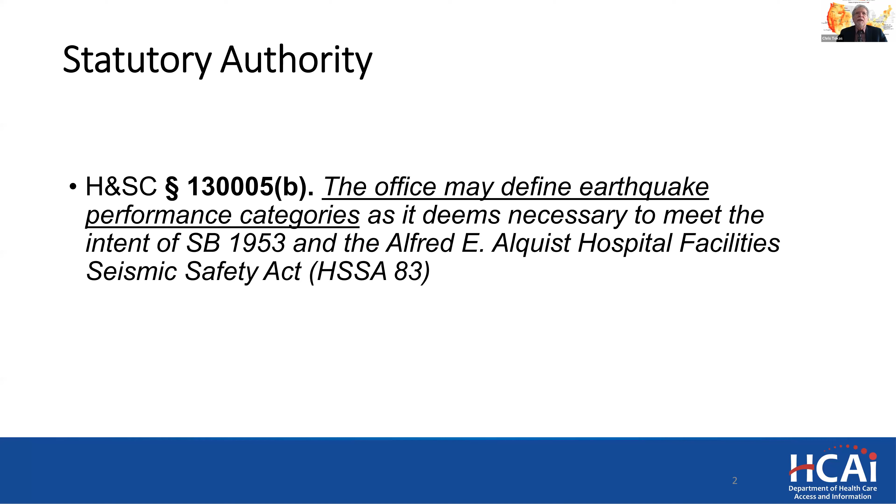So in 1994, the statute changed and required that all existing hospital buildings be evaluated. They were evaluated and placed in the appropriate performance category for each building. And through the Hospital Building Safety Board and the industry in full participation, it was decided that we had to have 5 performance categories, SPC 1 through SPC 5. All the pre-73 buildings, because that's when the Seismic Safety Act took place and created a new performance criteria for hospital buildings, which basically has become de facto around the world.

They were either placed in 1 or 2. 1, buildings that pose threat to life. 2, buildings that just made what we call life safety performance, which in reality still pose some form of risk to life, but it's very low. So all post-1973 buildings were placed in 3s, 4s, and 5s, depending on when they were built, the codes they were constructed to, the deficiencies that they had, and so on.

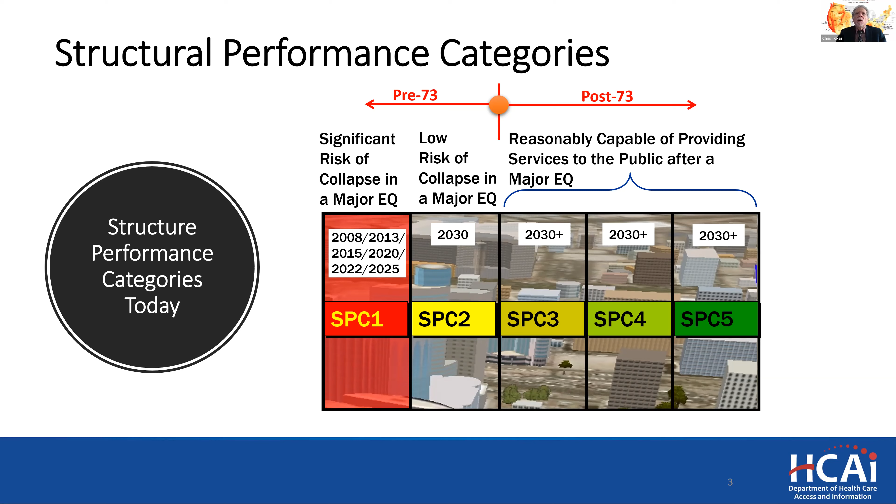Now, the next step was to go through the seismic evaluation reports, justification, everything else, and then quantify if the evaluations were done appropriately. In the meanwhile, hospitals had until 2008 to correct those deficiencies in SPC 1 buildings, so they're no longer collapse hazards, or remove the acute care services from those buildings.

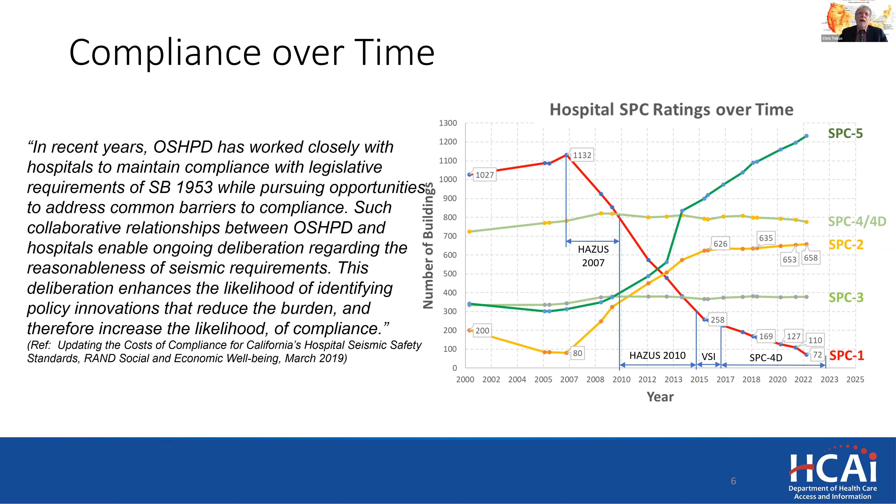So now, where are we today? Today, as you can see, we have about 700 SPC 2 buildings. We have 658 buildings in the SPC 2 category, but we still have 72 SPC 1 buildings. When I say SPC 2 buildings, here is again the paradox. They're not true SPC 2 buildings, and that's why I subdivided the SPC 2s.

Remember what I said a minute ago: most of the SPC 2s that we have today are truly SPC 1s, but they were reclassified SPC 2s based on a short window of probabilistic risk as far as the seismic hazards at their site, in their vicinity. So 514 of those we call SPC 2Hs, because they have been reclassified through the probabilistic analysis of hazards. And the true SPC 2s, either through retrofit or through evaluation, are, as you see there, 143.

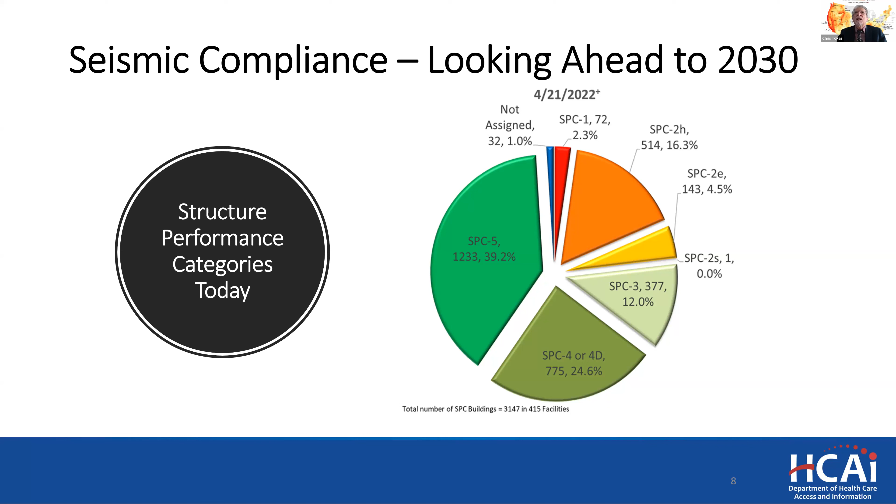There is a misconception of what an SPC2 building really means. Our building standards regulations say these buildings do not significantly jeopardize life, but may not be repairable or functional following a strong ground motion event. Meaning they have reduced probability of collapse, but may still have significant structural deficiencies that lead to damage beyond any point of repair, and they're not capable of providing services after a major event.

Some people don't understand that these buildings can be red tagged, requiring complete evacuation, or yellow tagged depending on the type of damage. They're not hospital grade buildings.

Hospital grade buildings, again not by California requirements but by national standards, have to be functional, and that's why they're designed to different standards. There are several issues with a hospital building suffering damages in an earthquake—it's detrimental to the community, inversely proportional to the resiliency of the community.

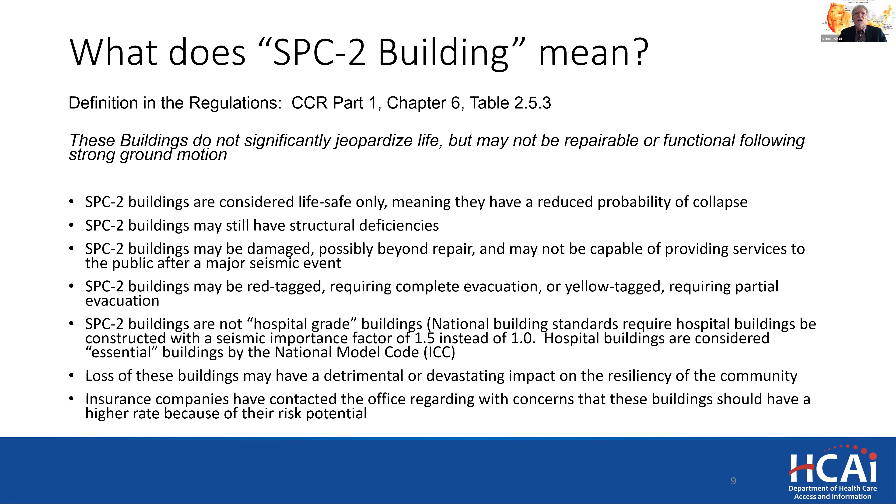I included this slide because we hear a lot of discussion about what an SPC2 building actually is.

The good news is that by 2025, we are projecting 673 SPC2 buildings. The bad news is that there is a number of facilities—60% of facilities across California—that have at least one SPC2 building. So that's not encouraging.

I will pass it to Roy, and Roy is going to move to the discussion on the main topic of SPC4D, and then Ali Zoomer is going to go into the non-structural issues, which is equally important.

Thanks, Chris. My name is Roy Lobo, I'm the principal structural engineer with HCAI. I will be going through a very quick, high-level overview of SPC4D refresh. We'll be talking a little bit about the motivation, some of the challenges we were facing in creating this new performance standard of SPC4D.

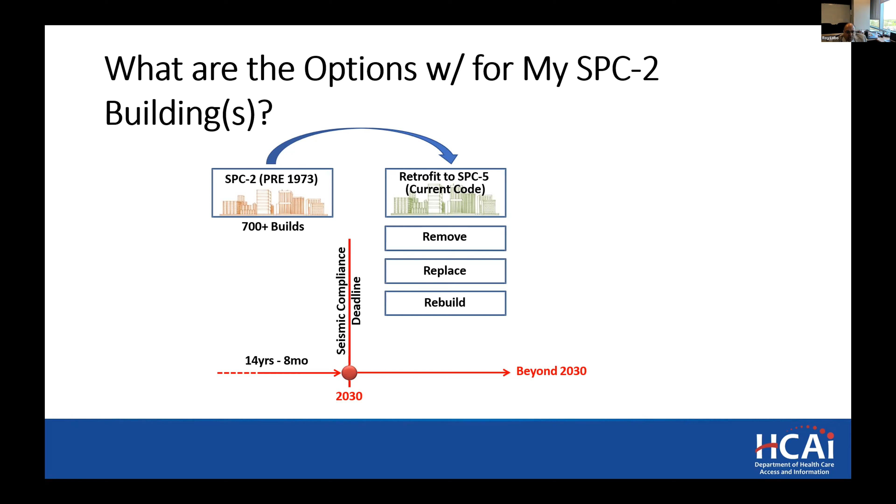So we were looking for a new solution. The intent of SB 1953 was to encourage—for buildings that do not pose significant risk of collapse—retrofits and enhancements to improve the ability of hospitals to remain operational. That was the intent of SB 1953 for the SPC2 buildings that were not going to be able to provide GACH services continuing beyond 2030.

So what were some of the concerns for 2030 compliance? This was back in 2013—model codes were changing, and it was becoming more and more costly because of code creep to upgrade an existing building to the SPC5 category, which was the only option at the time. Rural and other hospitals in underserved areas had limited resources to upgrade to current code.

The other thing was that SPC1 and SPC2 buildings were the original hospital buildings. They may be landlocked between other SPC buildings of higher ratings. But if you take that building out of service, it could cause the whole hospital to be non-operable. And the hospitals may not have property to build a replacement, because over the years the area around has been built up.

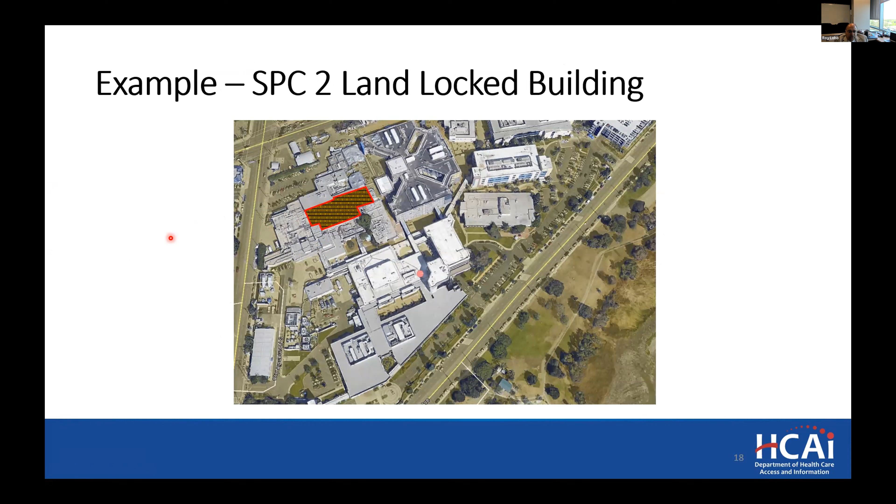So what was the motivation for creating this SPC4D performance category? The motivation was that there are some SPC3 and SPC4 buildings that are permitted to continue providing service beyond 2030. So we were thinking, is it possible?

At that time, the only option was to upgrade your building from SPC1 or 2 to SPC5. So is it possible to create a comparable SPC4 building instead of going all the way to current code? By doing that, we have less retrofit. We put targeted retrofit to specific elements, and we can minimize and reduce disruption to ongoing services. Hospitals could use this option to strategize their master plan and come up with cost-effective options.

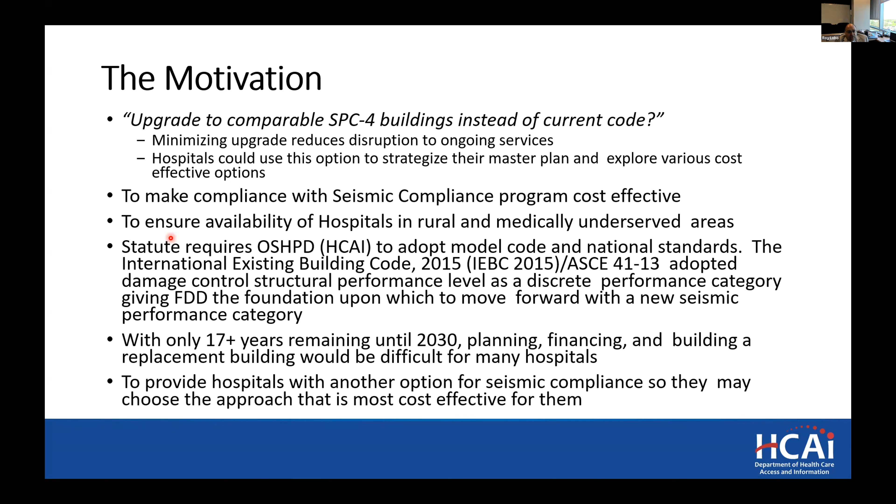It was also to provide hospitals with another option for seismic compliance so they could choose the approach most effective for them. That was the motivation. Then we were looking for the statutory authority for us to do that.

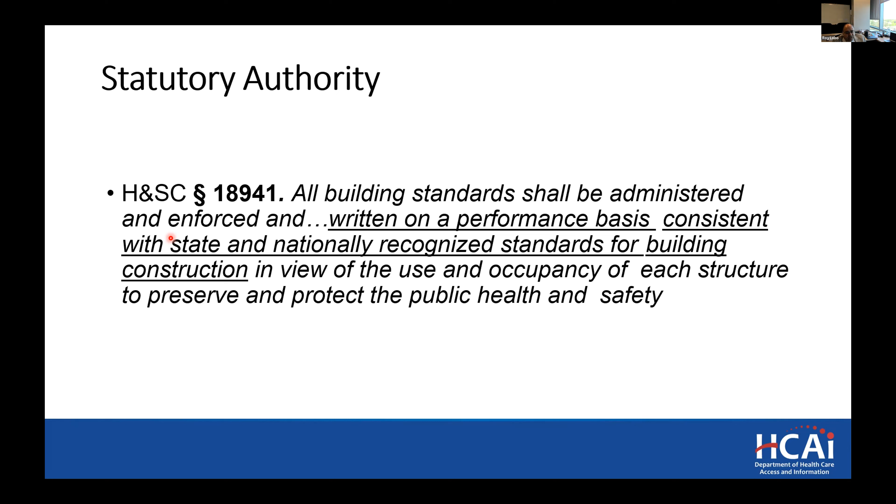We have that. It's given in Health and Safety Code section 18941. It says that all building standards shall be administered and enforced, written on a performance basis consistent with state and nationally recognized standards for building construction. So using that authority, we were looking for a solution.

Around 2013, ASCE 41-13 had just come out, and they also had a new performance level called damage control performance level. This damage control performance level is a level between immediate occupancy and life safety. That was given in the model code ASCE 41, and it's shown in this figure here.

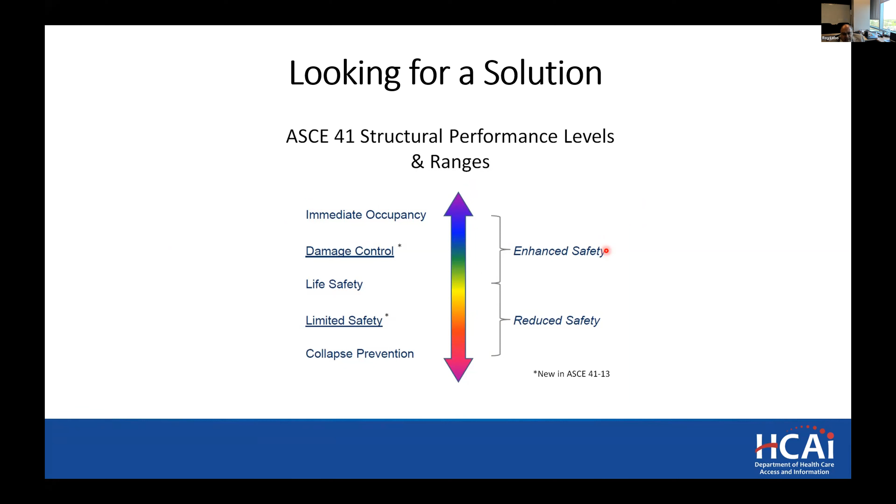So we have enhanced safety, shown by this blue arrow going up: immediate occupancy, then damage control, then life safety. Enhanced safety is beyond life safety, so your building will not only be life safe, but also has the chance of being operable at the same time. Then you have reduced safety, which is limited safety and collapse prevention.

So we had some options to explore: what can we do with our SPC4D buildings? Traditionally, we were just looking at life safety at that time, so the level of performance would be about that—your building would be damaged but life safe, though you may not be able to operate and perform as a hospital building.

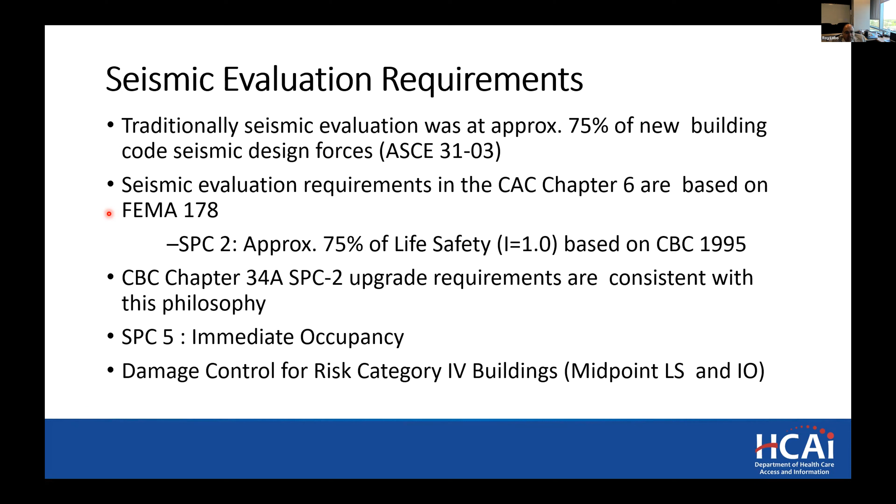Otherwise, you would have to upgrade it to SPC5. But with this new damage control performance level for risk category 4 buildings, we asked, could that be a viable option? For SPC2 buildings, which are the pre-1973 buildings, these did not have adequate seismic detailing and had seismic vulnerabilities.

So the only option for SPC2 buildings was to upgrade them to SPC5. SPC5 buildings are buildings built from 1989 onwards, to the 1989 code and onwards. However, there was a whole range of buildings classified as either SPC3 or SPC4.

SPC3 was the moment frame buildings, a separate category with pre-Northridge connections. But SPC4 buildings still had the seismic detailing connections—these are SPC4 buildings from 1973 to 1988. Any building built in that period was classified as SPC4, and they could continue to provide service beyond 2030. So we asked, is there a seismic performance category for this?

We decided we'd call it SPC4D, and we picked a midway point called 1980. CBC asked, is there a midway point where, if we upgrade now from SPC2 to SPC4D, is that good enough?

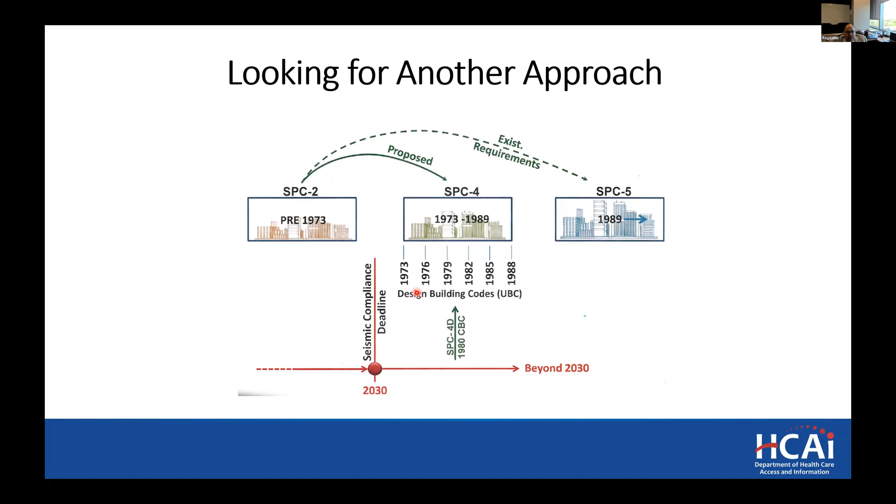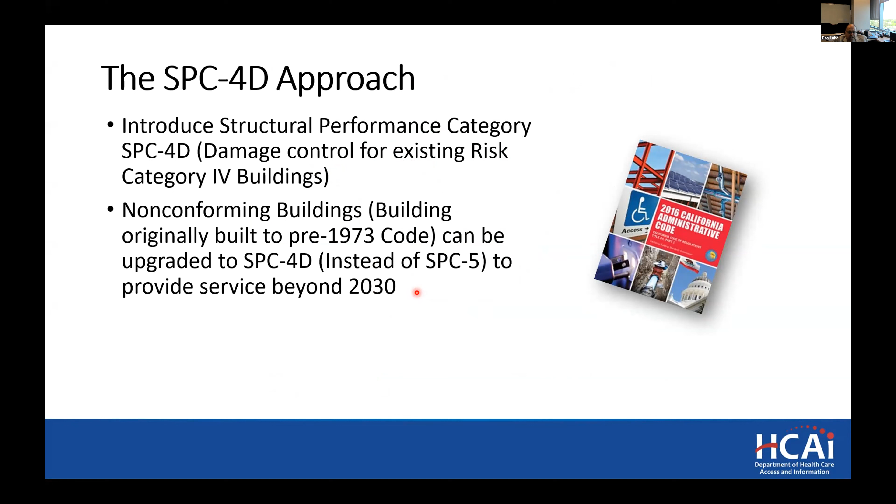We thought that could be good enough. We can upgrade it to the 1980 California Building Code, and then it would be adequate to provide acute care services beyond 2030. So the SPC4D approach introduced this new performance category for the non-conforming SPC1 and SPC2 buildings that could be upgraded to SPC4D, and then be permitted to provide service beyond 2030.

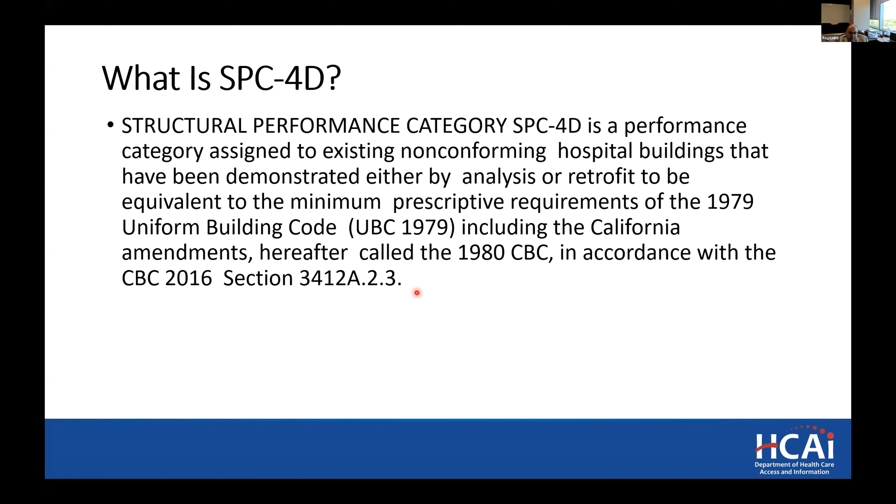So what is SPC4D? SPC4D is a performance category assigned to existing non-conforming hospital buildings that have been demonstrated, either by analysis or retrofit, to be equivalent to the minimum prescriptive requirements of the 1979 Building Code, including California amendments, which became the 1980 California Building Code. If you could show that your upgrade met this requirement, it would be classified as SPC4D, and you could continue to provide service beyond 2030.

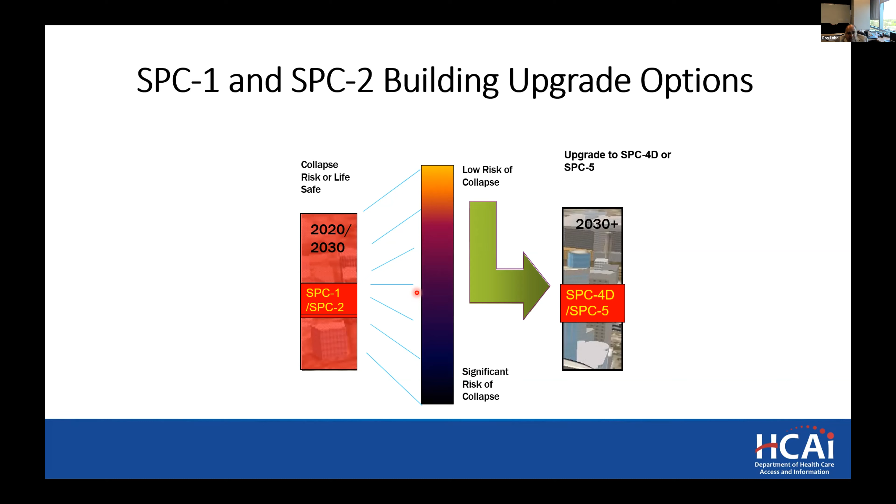So what were the options? What were the upgrade options for your SPC1 and SPC2 buildings? These are buildings, as Chris mentioned, that have a big range from low risk of collapse to significant risk of collapse. Previously you could only upgrade them to SPC5. Now we said you can upgrade them to SPC4D or SPC5.

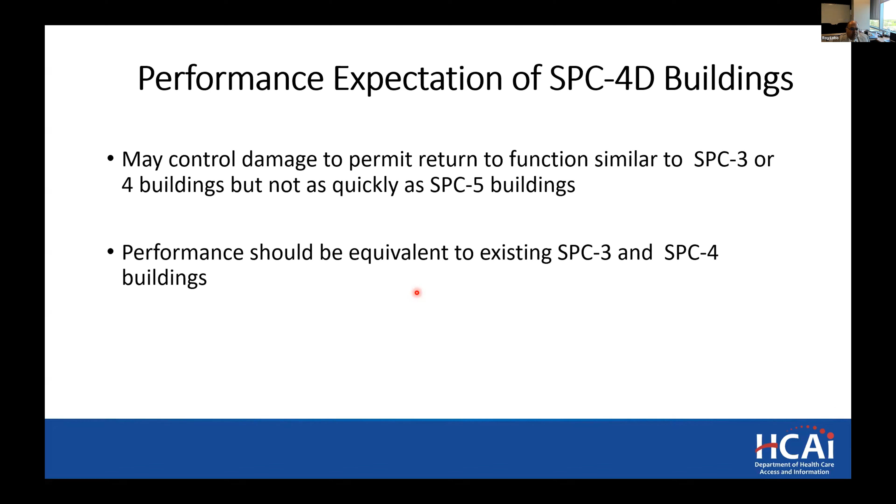So what's the performance expectation for the SPC4D building? They may control damage and permit return to function similar to SPC3 and SPC4 buildings, but not as quickly as SPC5 buildings. The performance should be in the same range as other buildings. If we have buildings from 1973 to 1988 that can continue to provide service beyond 2030, then I should be able to retrofit up to that standard.

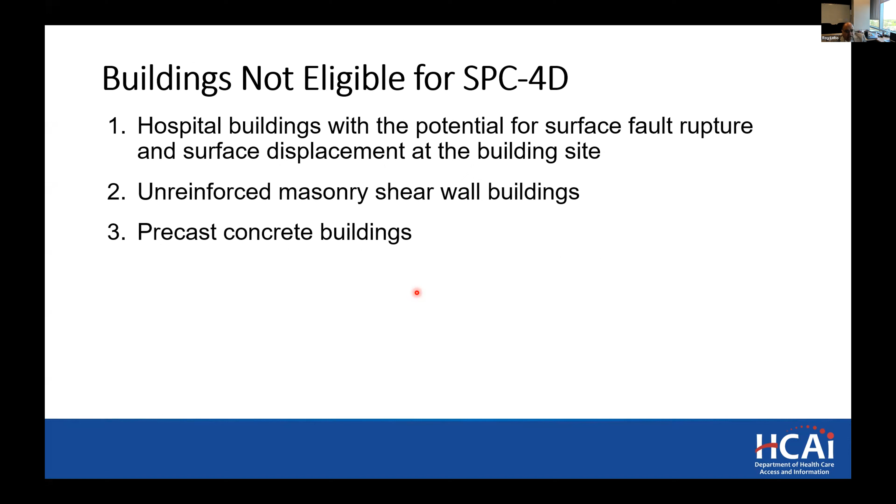However, there will be some buildings that we should not permit to upgrade to SPC4D. We said those are buildings on a fault - in the fault zone, which is 50 feet from a known fault trace - unreinforced masonry, or precast concrete buildings. Those are collapse hazard buildings, and they were not eligible for upgrading to SPC4D.

So, possible compliance issues using the CBC 1980. These are some of the challenges we had when we chose a building standard - okay, CBC meet that. But these are prescriptive requirements that had special seismic detailing, and you can't get an existing building to meet these prescriptive requirements. So therefore, you had to look for an alternate approach.

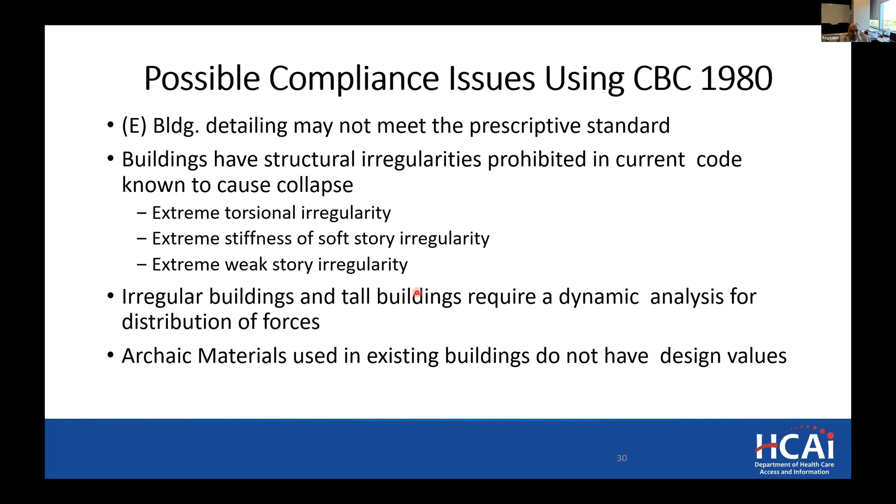The alternate approach was a performance-based approach given in ASCE 41, that permits you to evaluate your building, which has more brittle members and does not have the same ductility as prescriptive provisions. If we follow the ASCE methodology, which has different performance levels, you can decide based on the hazard risk. We can use that as a standard to say this is comparable to an SPC4 building if you upgrade to this level, and that will be good enough to continue providing service beyond 2030.

So we decided to choose two hazard levels. One is the BSE-1E earthquake, which is a 20% in 50-year earthquake, or a 225-year earthquake, and hazard level 2, which is a BSE-2E earthquake - this is your rare earthquake, which is a 975-year event.

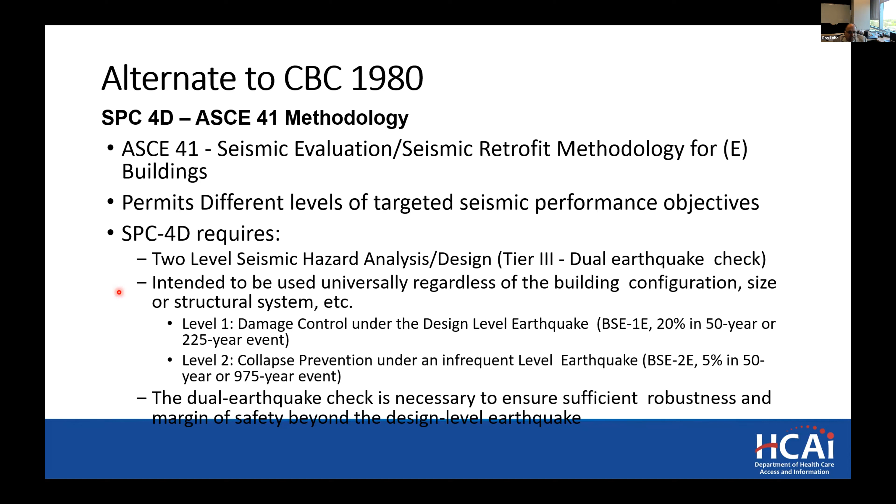At the more frequent level earthquake, we said you need to meet the damage control performance level. For the rare event, we figured out that the collapse prevention performance level was adequate. If they can upgrade the building to meet these two seismic performance levels, then they could continue to provide service beyond 2030.

Then if you move on to damage control, which is midway between life safety and immediate occupancy, you may see some additional damage, lights may be off and things like that. But we said that is good enough, because that is the same performance expectation for an SPC3 and SPC4 building. So if you have a strong design earthquake, meeting this performance was good enough. And if you have a very strong, rare event earthquake, then it should not collapse, right?

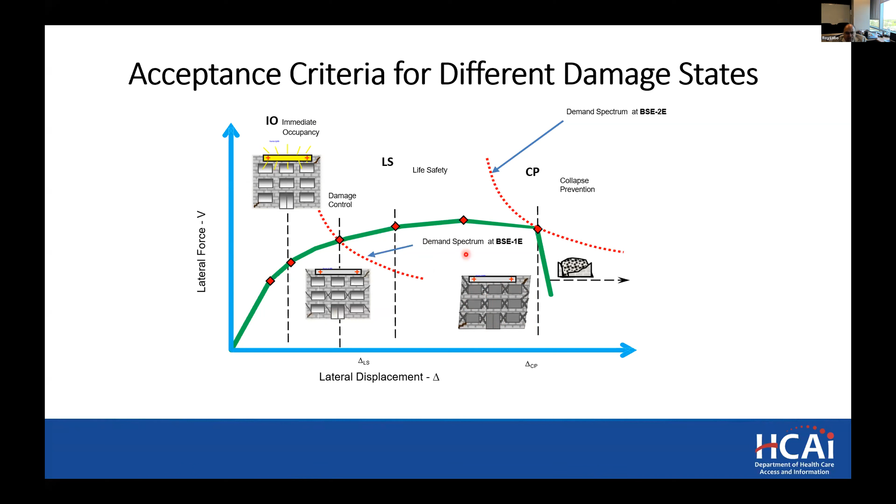So the collapse prevention performance level was the adequate level for this very rare event earthquake for these buildings to survive. I mean, it will probably not, they'll have to be evacuated, etc. But we hope those are not frequent, and it's a 1,000-year event earthquake.

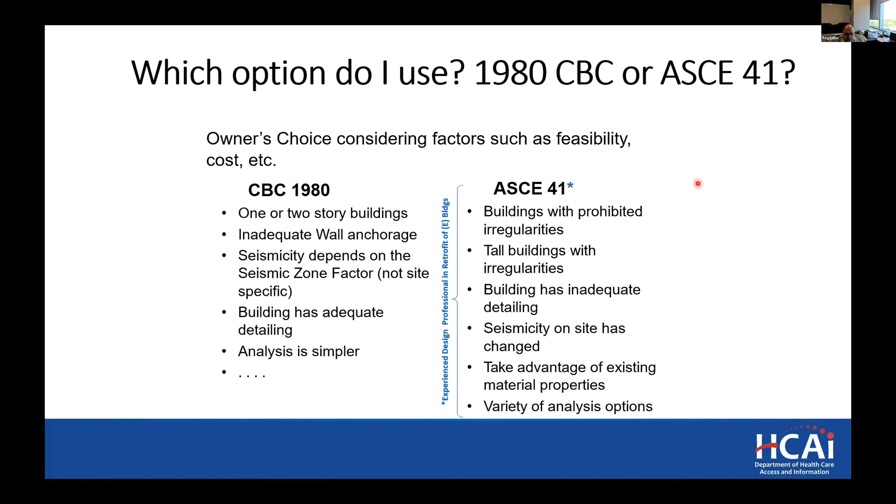So which option do I use, the 1980 CBC or ASCE 41? I can use the CBC 1980, which is the simpler method, but that's a prescriptive method. And most buildings will not be able to comply with that prescriptive method, and they would have to use the performance-based approach using the two hazard level criteria of ASCE 41. So if you could then upgrade to those standards, then you could classify your building as an SPC 4D.

Now, in order to get your building upgraded to SPC 4D for your SPC 1 or 2 buildings, what do you need to submit to HCAI? You will need to submit existing construction documents, and then you need field testing, inspection, and observation. So why do I need field testing, inspections and observation? Because these are pre-1973 buildings, they were non-conforming buildings at the time, and so they didn't have the necessary test and inspection.

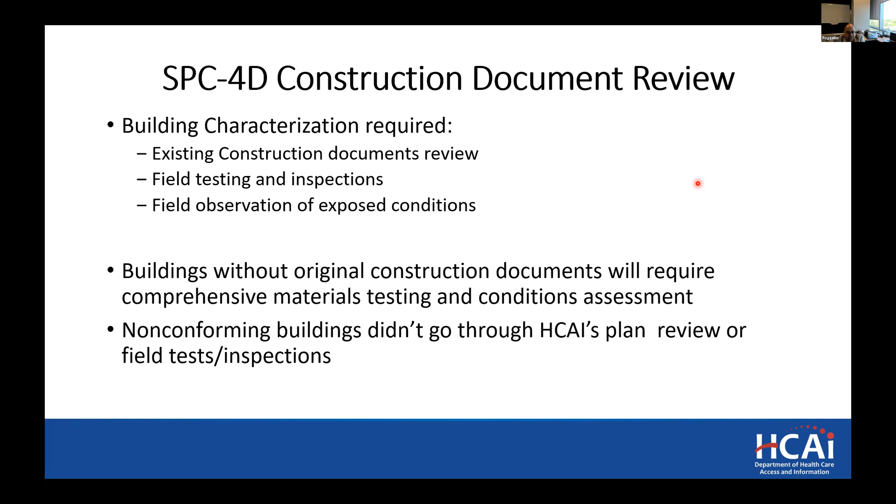So we need to have some measure to say, okay, we do some amount of testing to confirm the materials that you used, you can justify that, and then your analysis will prove out whether it can sustain that level of seismic hazard. And we have a new name for that. It's called an MTCAP program, which is a material testing and condition assessment program for the field testing and field observation program. So those are the documents you would need.

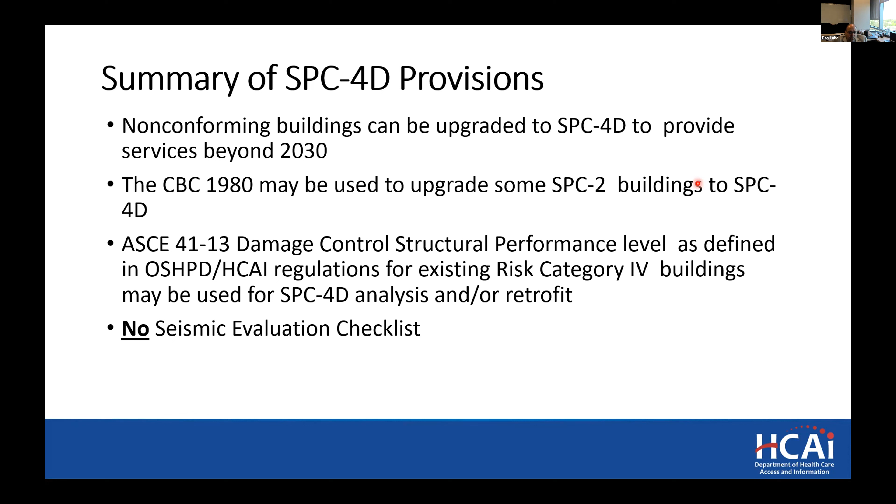So in summary, non-conforming buildings can be upgraded to SPC 4D to provide services beyond 2030. The CBC 1980 may be used to upgrade some buildings to SPC 4D, but because of the prescriptive requirements, not all would be able to use that approach. And then we had ASCE 41-13 damage control performance level. Risk category 4 buildings defined as SPC 4D would be able to continue to provide service beyond 2030. And the checklist that we had for upgrading from SPC 1 to SPC 4 would no longer be valid.

So retrofit was not the only cost. The cost of seismic compliance isn't the cost of the retrofit alone. There are also other costs involved, and that's where the hospitals need to be cognizant. Those are accessibility requirements. Whenever you're retrofitting an area, the path of travel also needs to be considered, and accessibility upgrades for that path of travel would be required.

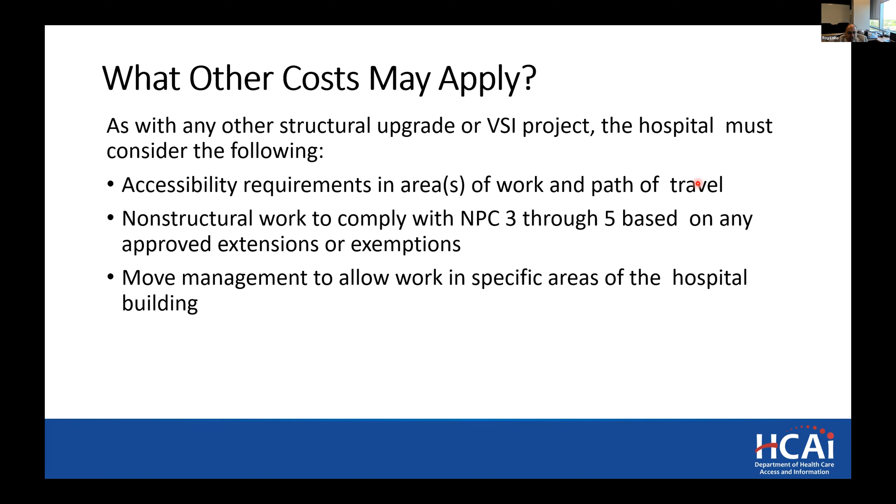Then while you're working in areas that are being retrofit, your building is going to continue to provide service beyond 2030. Therefore, some NPC work may also go hand in hand with that. And then you'll have to close down spaces, etc., for getting the retrofit done. So that additional cost would come into play.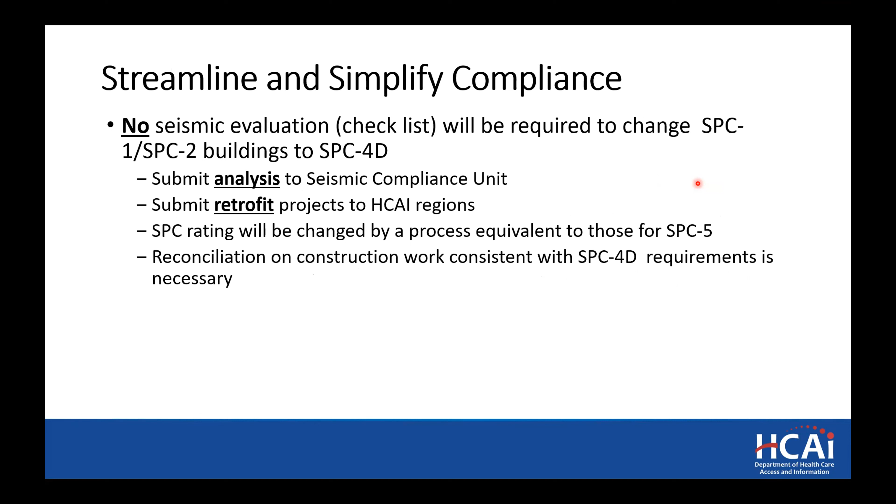So we tried to streamline the seismic compliance process to upgrade the building to SPC 4D. You submit an analysis to the seismic compliance unit; Ali Zumar is the supervisor for that. Then you submit the retrofit projects to the HCAI regions. And once the work is done, a reconciliation would need to be done to change the rating from a 1 or 2 to SPC 4D. So with that, I go back to Chris.

The reason why we included this slide is because I'm hearing some interesting conversations around the community that retrofitting to the SPC 4D category specifically will produce a building that may see damage, and you should retrofit to SPC 5. Retrofitting to an SPC 5, is it possible? Yeah, but again, you're dealing with existing buildings, so the cost is going to be fairly high.

So that's why we created the SPC 4D category, for all the reasons that Roy highlighted. Again, these are existing buildings, buildings of the age of 40, 50 years. So the enhancement costs have to be commensurate to what you're targeting. So when you choose your consultants, be very careful and choose people that know what they're doing.

So they have a proven record working with us in major retrofit projects, experience with existing buildings and materials, and familiarity with ASCE 41, because again, as Roy said, you can use the prescriptive code. There are certain buildings where the prescriptive code works very well, and certain buildings where it doesn't, and a little more sharpening of the pencil is warranted to resolve some of those deficiencies analytically, rather than bricks and sticks, which are very costly and disruptive.

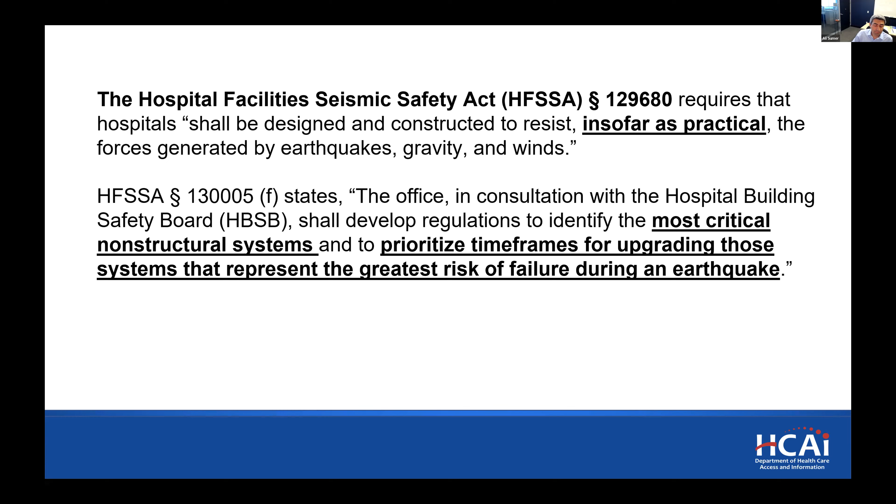The Health and Safety Code basically gives us the authority to develop regulations. In terms of non-structural, we're talking about the most critical non-structural systems and prioritized timeframes to upgrade those. So we look at risk of failure during an earthquake, and as Chris mentioned, we wanted practical, innovative ways to bring the facilities to compliance. Back in 2000 to 2008, there were 5 categories, 1 through 5. And in 2019, this new performance category came, NPC-4D, which didn't change the fundamentals, but created an in-between category between 3 and 4.

Let me put my laser pointer. Between 3 and 4. So to give a really broad overview, NPC-1 is basically not evaluated; the bracing and anchorage requirements are not met. Going from 1 to 2, certain things require anchorage, such as communications, emergency power supply, bulk medical gas, fire alarms, and emergency lighting. So it's a very limited look in terms of NPC-2. From NPC-2 to 3, first you need to be 2, and then NPC-3 gets into certain critical care areas. NPC-3 is about anchorage and bracing of equipment and utilities.

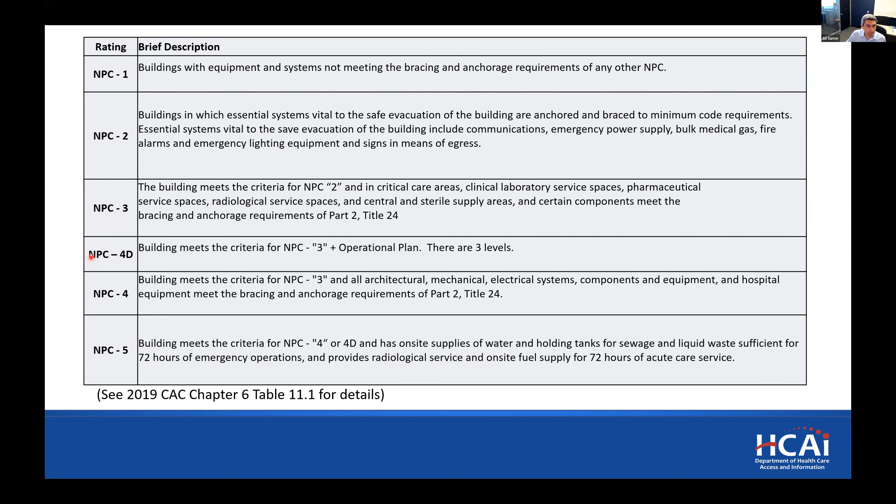Now you may wonder, okay, how can I just find out which building has which rating? So I put our website, and if you go to this link, and if you go to facility information, put your facility name or number in, and then click on the building list, you will see a list and all the details about SPC and NPC rating and what the deadlines are. It will show it right there.

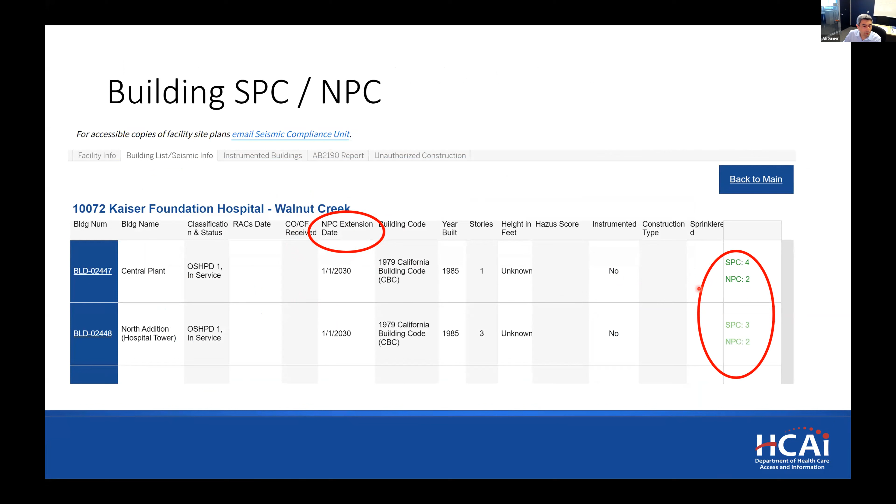Now, before I hop on to 4D details, I just wanted to point out that there's an upcoming NPC-3 deadline. So depending on seismicity, some facilities need to comply with NPC-3 by January 1st, 2024. So there's a lot of questions about how to get there. We are helping a lot of facilities to get there. So seismic design category F means that it has a very high seismicity, and that's why the deadline is earlier than 2030 for NPC-3.

I'm not going to go into detail about the interaction between the SPC and an NPC with the deadlines. For today's topic, NPC-4D deadline is 2030. Now, when we talk about the 2030 deadline, that deadline is the final compliance date. So everything is constructed, done, and getting the NPC rating.

So code actually gives a timeline about how to get there. So in about 2 years or less than 2 years, all facilities with general acute care buildings need to submit evaluation for NPC-4, 4D, and 5. So I try to repeat this at every meeting. This is not getting the rating. This is to submit the evaluation.

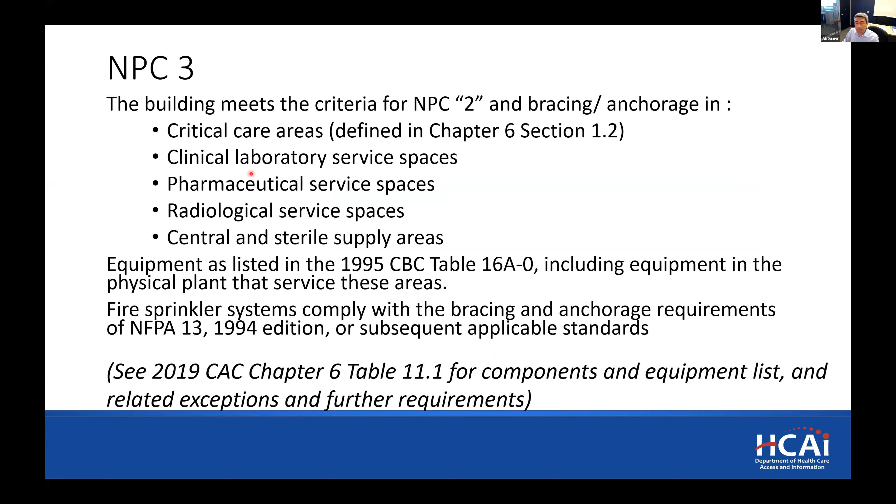So I'll just skip this NPC-3. I just put the list. These are the areas that need to be anchored. And for NPC-4D, you need to be NPC-3, and then start looking at the areas that are not anchored in an NPC-3 building.

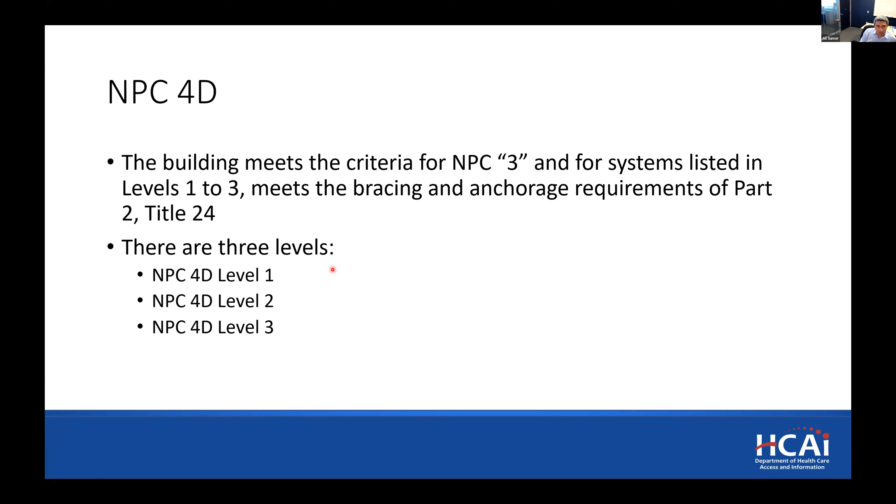So as I mentioned, NPC-4D, first you need to be 3, and NPC-4D breaks down into three different levels. So level 1, level 2, level 3. And all levels require an operational plan. And that's where most of the questions I get are, about what it is and what to do.

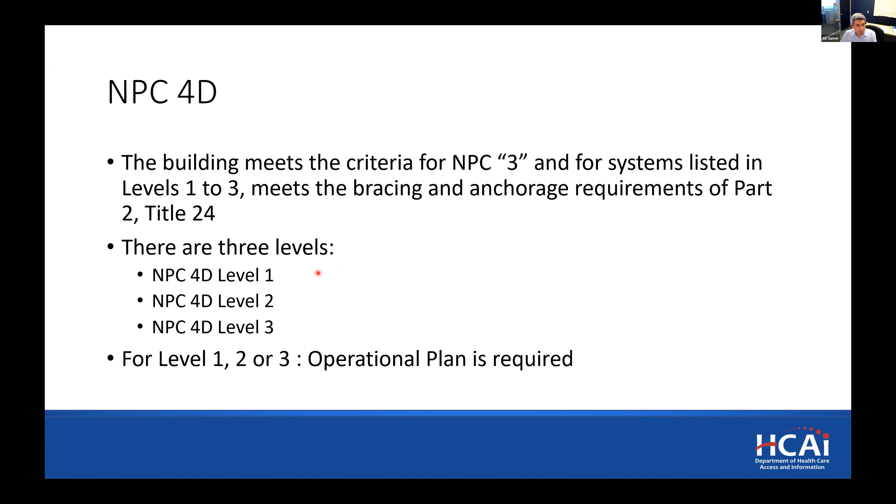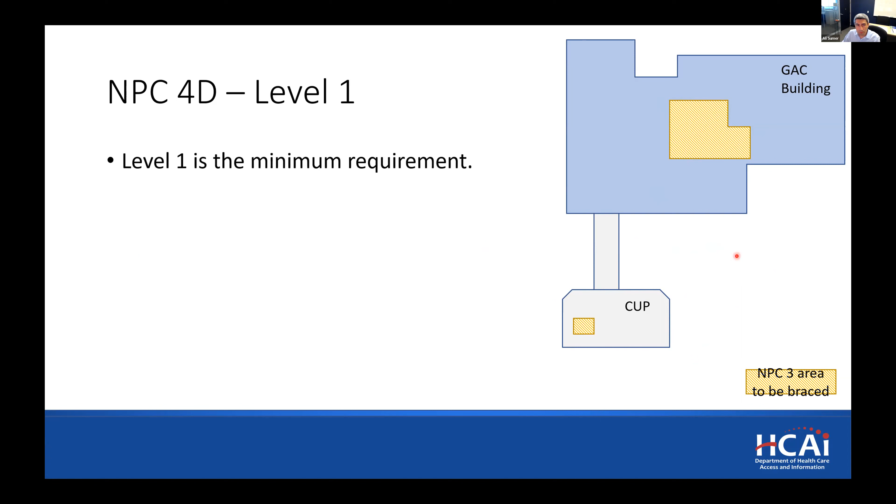Let's start with NPC-4D level 1. So let's say you have a general acute care building, and you have a small critical care area. And every building has some central utility plant or some source that supplies many different things. In the NPC-4D world, level 1 is the minimum requirement. So level 2 or level 3 are not required as a minimum.

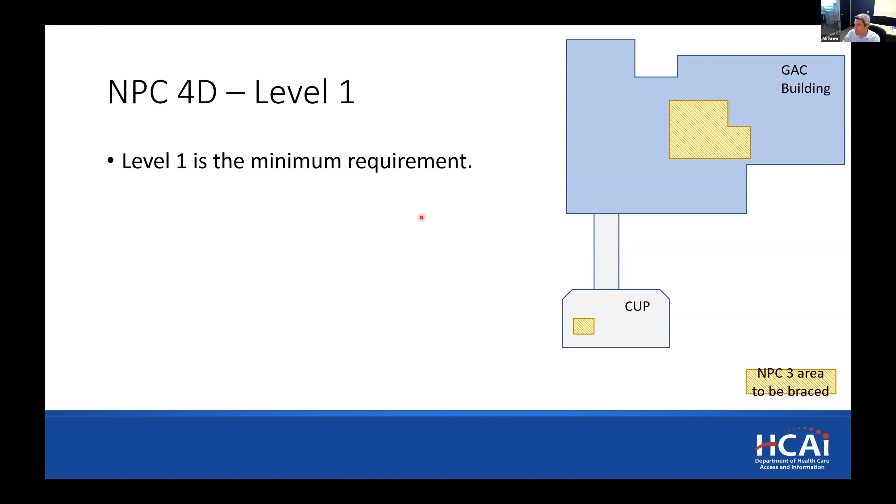So you may ask, okay, then why should a facility go to level 2 or 3 if it is not a requirement? And you will see in a moment why a facility may want to choose level 2 or level 3. So again, level 1 is NPC-3 plus operational plan.

And I just want to point out the equipment in 1995 CBC Table 16A-0, including equipment in the physical plant that serves these areas. So NPC-3 also requires anchorage of the equipment that is in the central utility plant or the place where it serves the building, not in between. So the utilities that go from the CUP to the critical care areas are not included in the bracing requirement under level 1.

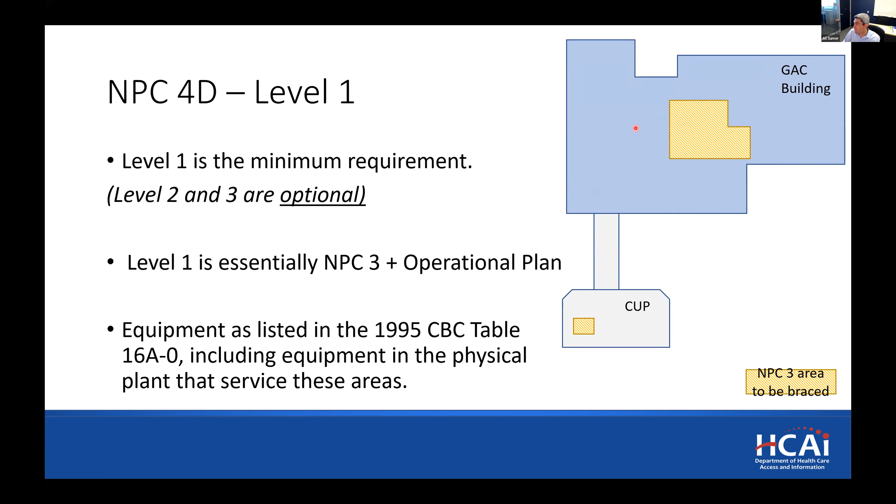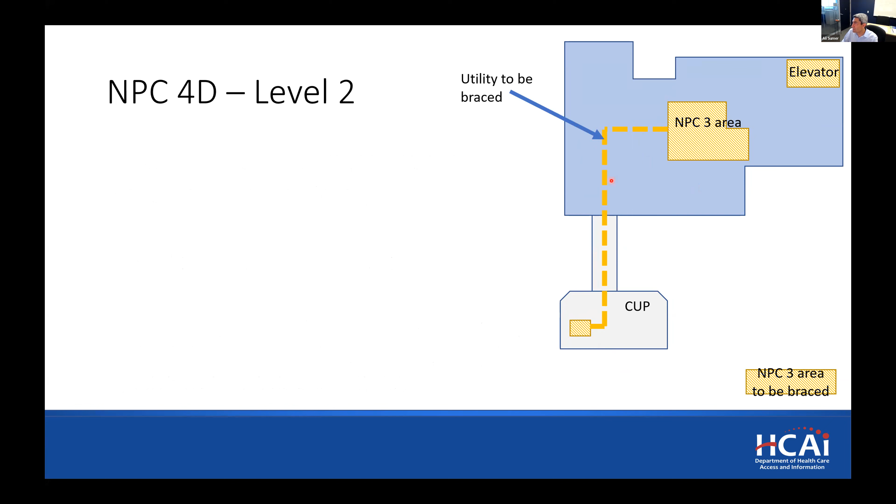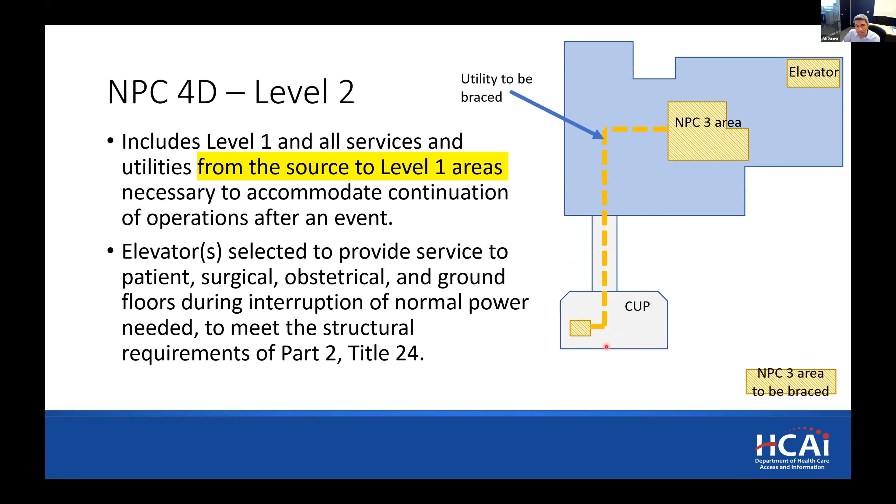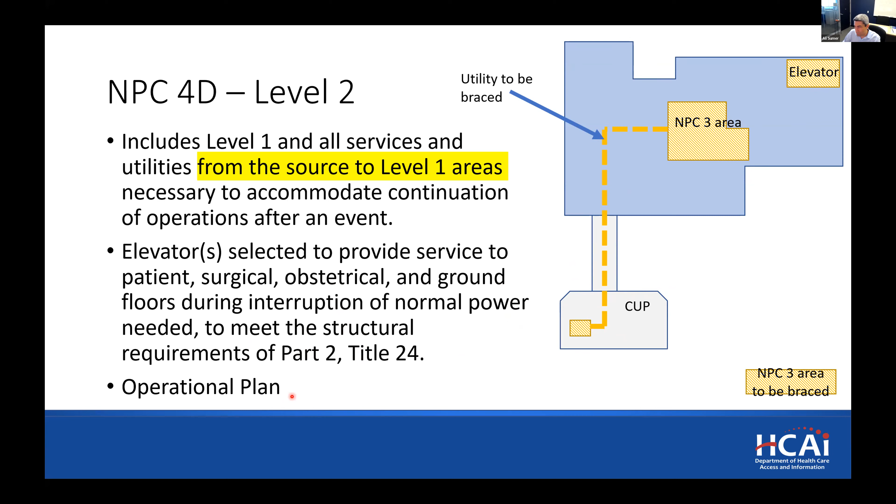What about level 2? So level 2 now says that, okay, everything including level 1, and in addition to that, the utility in between needs to be braced from source to the critical care area. So that's a big difference between level 1 and 2. And also it has an elevator clause with certain requirements. So again, the takeaway is the utility to be braced and an elevator. Of course, everything comes with an operational plan, which I will come to very soon.

Level 3 includes level 2, and basically it has more areas that the hospital chooses. So if the hospital says, okay, I want this area to be included in that bracing and evaluation, then that's level 3. So level 3 doesn't have a predetermined set of areas. It's a hospital decision.

Now, the famous operational plan. First of all, I want to stress that this is an owner-approved plan. In the beginning, we saw a few plans that only the design professional prepared, but not consulted with the owner. So when we brought in the owner, that plan changed completely.

So as design professionals, when it comes to the operational plan, facility has to be involved. This group with this background is a key player on this operational plan, because the facility knows their buildings the best and what they want to do. So the operational plan is really important in that aspect.

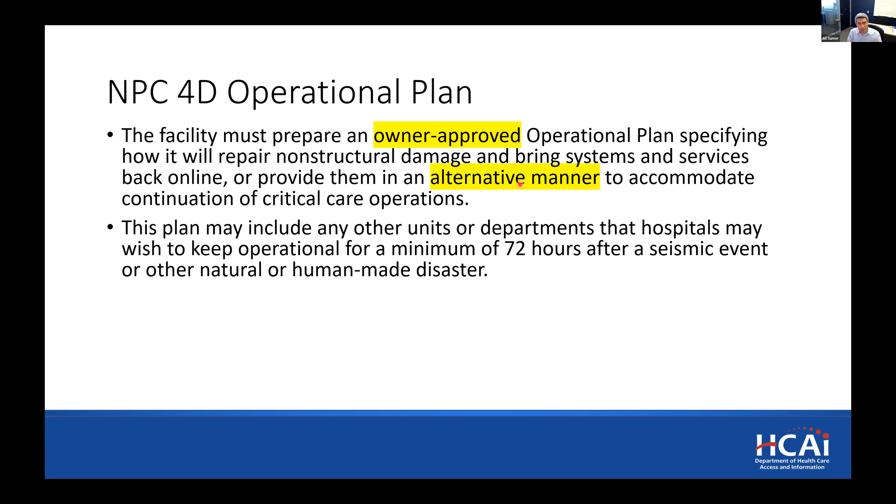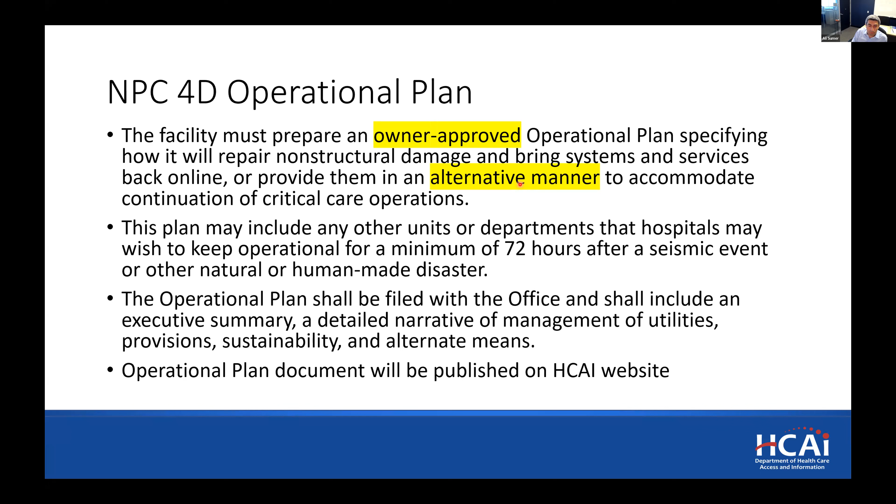Again, this is about the hospitals wishing to keep those operational for a minimum of 72 hours. So how can we get there? In order to shape this plan, we put some minimum pointers to fill out so that we talk about this alternate means in a more focused way: an executive summary, a narrative of management of utilities, sustainability, and alternate means. We will publish this operational plan on our website, so please keep that in mind.

So what are the items to include in the operational plan? For level 1 areas, basically critical care areas: the schematic of all utilities serving the areas, materials on hand to make necessary repairs, prioritization of the essential electrical system, and a plan to maintain these areas in operation, including all necessary utilities and equipment for functionality. And also an arrangement in place to transfer the services in the event the hospital services are not operational or cannot be made operational immediately.

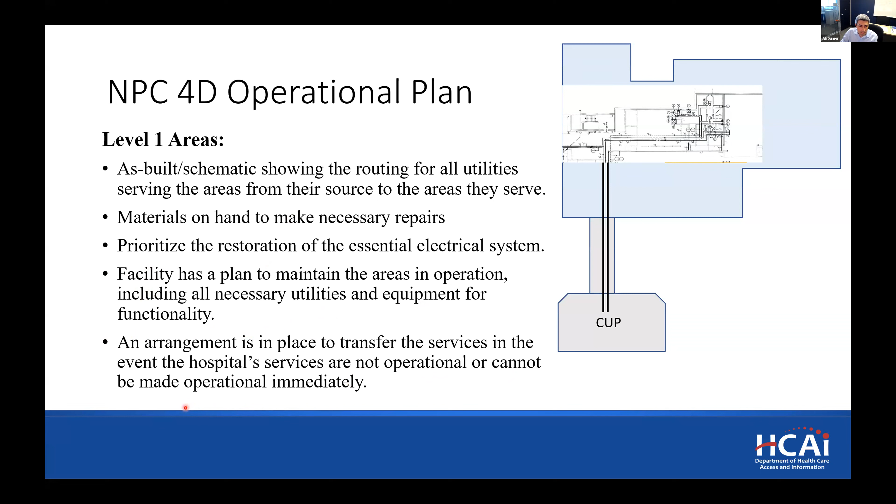So, let me go back one. These are for level 1 areas. There are further items in the operational plan, and I will talk about each one of them individually quickly. Central sterile supply: the key word here is means to obtain central sterile supply items. Dietary, means to obtain food. Pharmaceutical, again, means to obtain. Then water supply, medical gases.

So it all comes down to, what's your alternative? Emergency power has a set of pointers on how to get there. For those of you who worked on NPC3, these items will be easy to answer. What I recommend to the facilities is when you are working on 4D, on the side, start working on NPC5, because there is some overlap between the statements in the 4D operational plan versus 5. If you already have answers for 5, just copy those into 4D, because anything acceptable to 5 is acceptable to 4D.

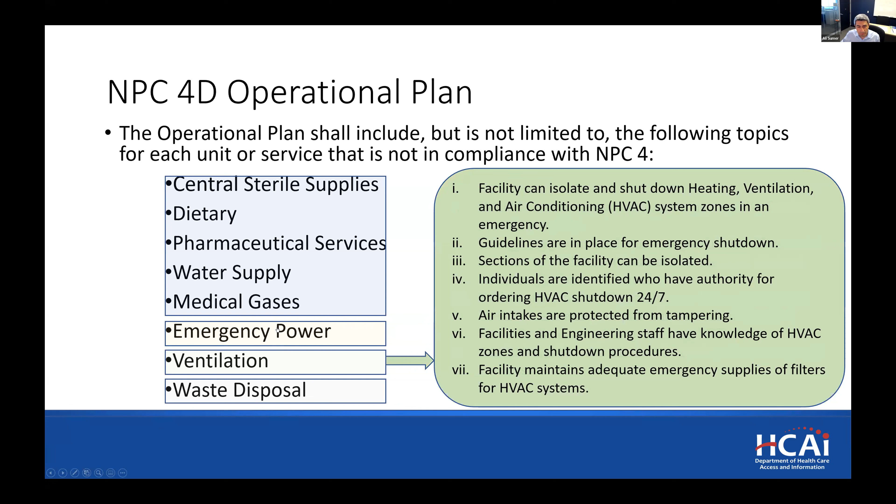So rather than reinventing the wheel on two different evaluations, to save time and for future strategy, I recommend marrying those. If NPC5 is not on the table at this moment, then at least think of the future items and bring some of those here. Emergency power, ventilation, waste disposal. Again, what are the alternate means?

Nine minutes, so I'm going to go through one example. Let's say you have a GACH building with no critical care area, no kitchen, and no areas listed in NPC3. So then what do you do? Let's say this has admin spaces and med-surg beds. Looking at level 1 areas, I'm asking, is that a critical care area? No, then these areas don't exist, so you don't have to provide these.

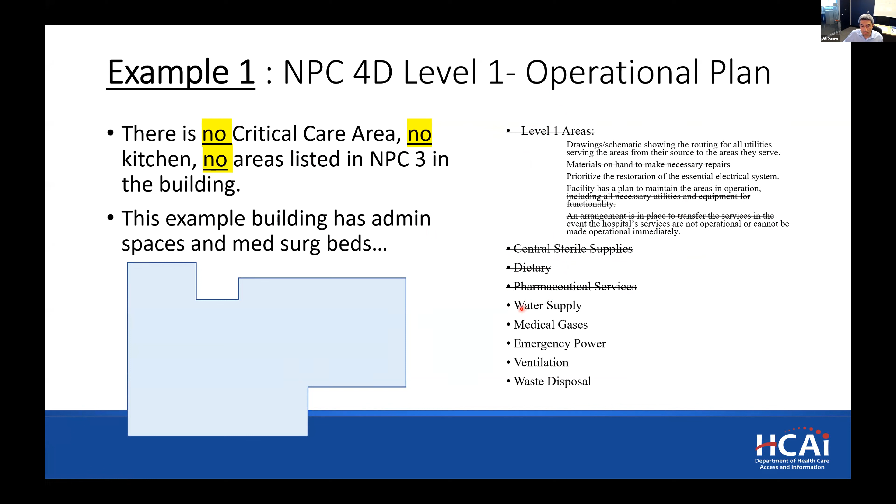Central sterile supplies, let's assume there's none here. No kitchen, so no dietary; no pharmacy, so no pharmaceutical services. So what items are left for the operational plan? Water supply, med gas, e-power, ventilation, waste disposal. Those are the statements that the team should focus on.

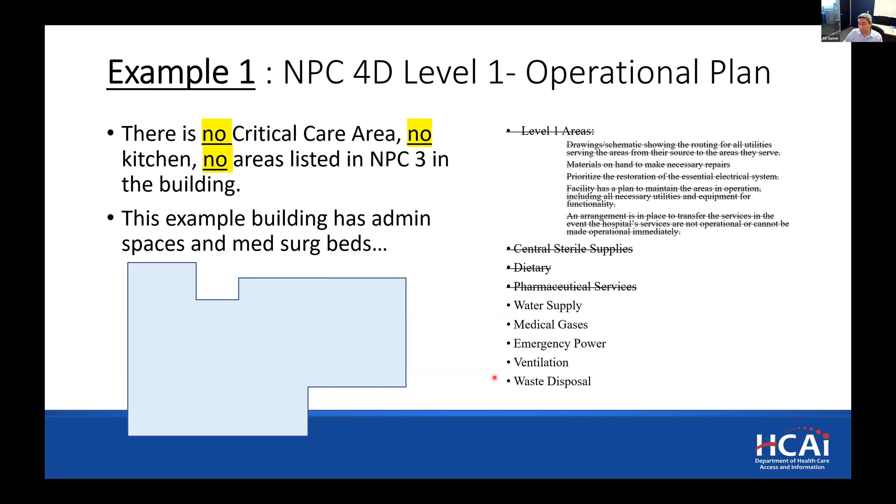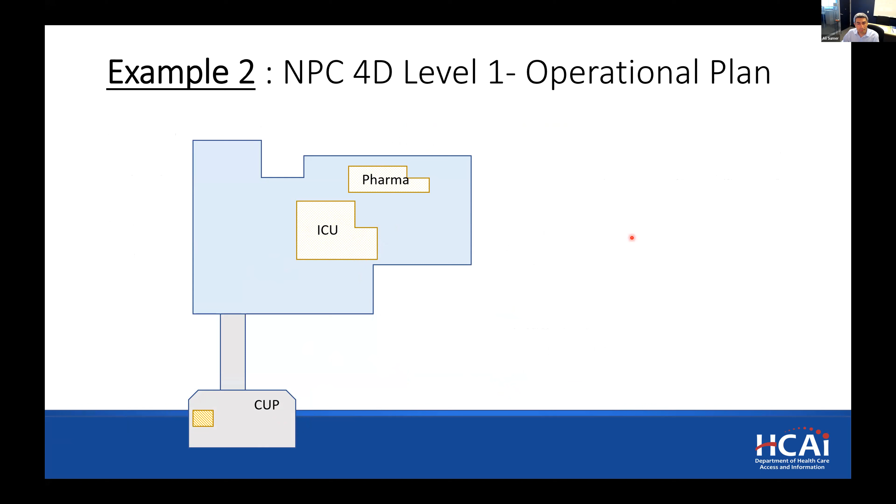Example 2, let's say you have a critical care area, then what's the plan? Let's say there's an ICU and pharmacy, but no kitchen and no central sterile supply. Yes, there's a critical care area, but if you are seeking level 1, then you do not need to brace these utilities, but we need to know where they are.

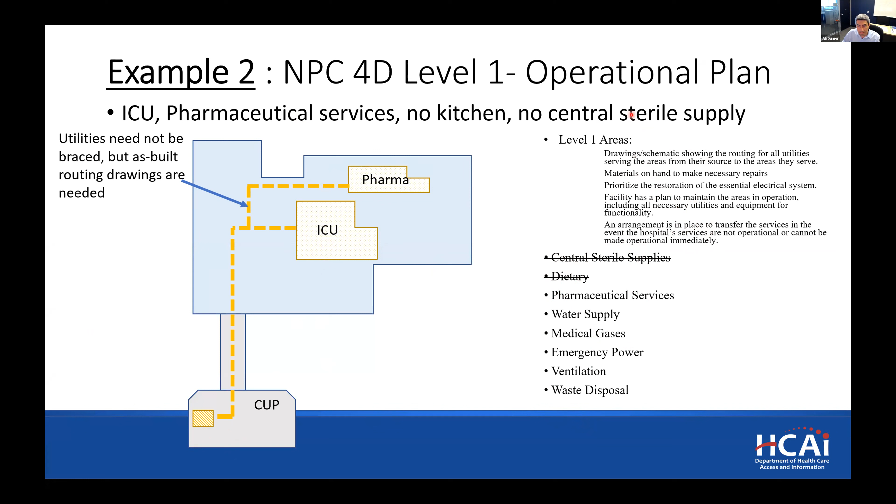So what we ask is, give us a schematic for those and the other items. But if you have items that don't apply to this building, then cross them out and focus on the rest of the items. Again, since there is a critical care area, the first part applies.

NPC-4, again, some facilities look at two evaluations at the same time. They run NPC-4 and they look at NPC-4D and what the expected performances are. Sometimes after looking at 4D, they go to 4. Sometimes looking at 4, they go back to 4D. So anyways, it's an option, but 4 requires bracing and evaluating all architectural equipment. So the exceptions in the NPC-3 areas don't apply. So this is very important.

But I just want to emphasize that a lot of buildings have gotten a lot of upgrades over the years. A lot of projects, TIs, many things. The rooms that get a full TI, there is no need to do re-evaluation in those spaces. So what we ask in the NPC-4 evaluation is that you just bubble the areas that had a complete, let's say, regut. We don't need to look at the things that were inspected and installed and are conforming.

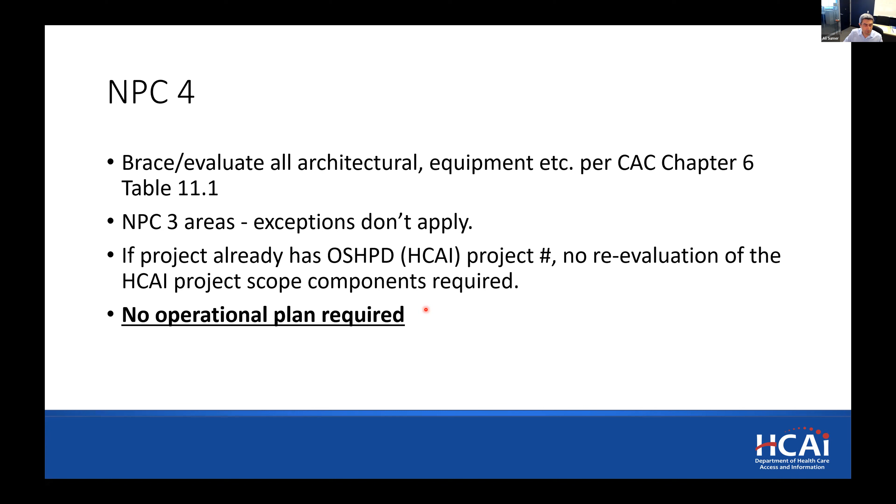So a lot of design professionals see that, okay, half of the building is already done, so I don't need to look at those. Now let's focus on the things that were not looked at or not upgraded. So when those things are put together in an evaluation, sometimes the facility sees that there's not much to do anyway, so maybe 4 is a good option. The good thing in 4 is there's no operational plan, so you don't have to come up with innovative ways to say this is the alternate means.